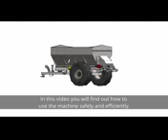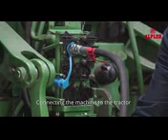Connecting the machine to the tractor. Settings with ISOBUS. Adjusting the door and more. Thank you for choosing us. So let's start.

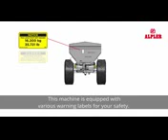This machine is equipped with various warning labels for your safety. Please pay attention to the warning labels.

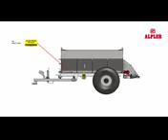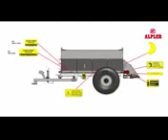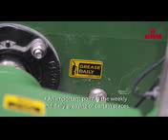Things to consider before use: keep the machine as clean as possible, check wheel nuts daily before use, and check tire pressures before use. An important point is the weekly and daily greasing of certain places. These points are indicated on the machine by yellow labels. For more information, read the user manual supplied with the machine.

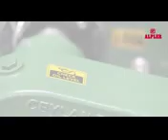Another important point is the height of the spreader discs from the ground. For effective spreading, the two spreader discs must be at the same height from the ground.

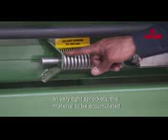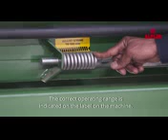During machine operation, the tension of the chain must be correct. In very tight sprockets, the material to be accumulated will cause the chain to jam while spreading, and too loose will cause the chain to jam and not return. The correct operating range is indicated on the label on the machine. Check after each load for the first day while the chain is bedding in, and adjust to the setting indicated.

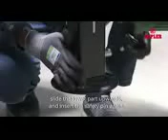First, connect the machine to the tractor. After, remove the pin at the bottom of the support leg, slide the lower part upwards, and insert the safety pin again. Connect the large diameter return hose to the return line breakaway coupling on your tractor. Connect the small diameter pressure hose to the pressure line breakaway coupling on your tractor. Make the ISOBUS connection.

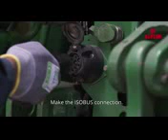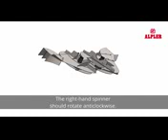With the tractor idling, engage your hydraulic spinners. The right-hand spinner should rotate anti-clockwise. The left-hand spinner should rotate clockwise.

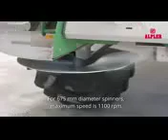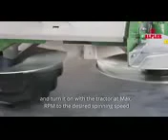Spinners can be overspeeded. Check your tachometer. For 675mm diameter spinners, the maximum speed is 1100 RPM. In any new setup, always turn off the flow control before starting and turn it on with the tractor at max RPM to the desired spinning speed. Check the flow control setting to keep the maximum spinning speed within the above parameters.

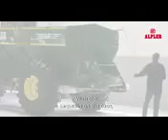With the tarpaulin on the case, you can protect the material you use from adverse weather conditions. You can manually open and close the canvas as follows.

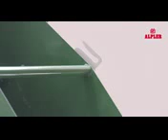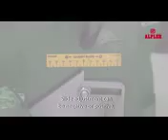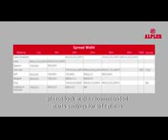Slide adjustment can be negative or positive. Please refer to the recommended start settings table. Side plates and rear side plates have to be at the same height. Please look at the recommended start settings for side plates and adjust the rear plates accordingly.

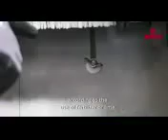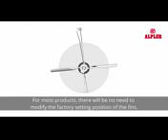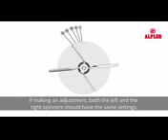You can adjust the panel on the back of the machine according to the use of fertilizer or lime. For most products, there will be no need to modify the factory setting position of the fins. However, if spreading different kinds of products, having adjustable fins can be very useful. If making an adjustment, both the left and the right spinners should have the same settings. In setting codes, L, M, S are abbreviations of long, medium, and short fins respectively.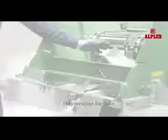This position is for lime. If you use any kind of fertilizer, you have to take that accessory off the machine. Also, you have to remove this part by moving it downward. Your spreader is ready for fertilizer now.

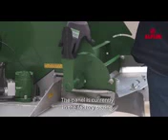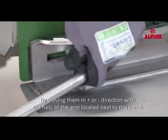The panel is currently in the factory setting. There are values for the positive and negative directions on the label. You can loosen the nuts and move them to the desired position in the positive or negative direction with the help of the arm located next to the panel.

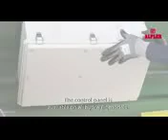The control panel is available on all hydraulic models. Thanks to the valve in the control panel, it helps you make the necessary settings with the help of the computer on the tractor. Two sections control the spreader discs in the valve, and the other two control the twin chain.

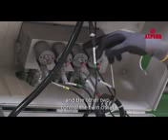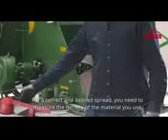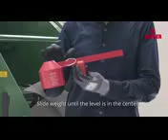You can use various materials with this machine. For a correct and desired spread, you need to measure the density of the material you use. Fill the container until full. Balance the ring, sliding the weight until the level is in the center. Read off the weight per cubic meter in tons.

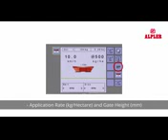Before starting to spread, you need to enter the following parameters: working width in meters, application rate in kilograms per hectare, gate height in millimeters, spinner disc RPM per minute, setting working width, and spinner disc RPM.

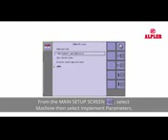From the main setup screen, select Machine, then select Implement Parameters. Enter the desired working width and disc RPM. To select disc RPM correctly, please refer to the Spread Width table.

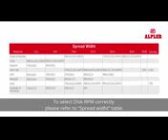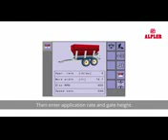Setting application rate and gate height: from the main setup screen, select Job Parameters. Also, you can use the Job Parameters shortcut on the main screen. Then enter the application rate and gate height. Refer to the rate charts at the rear of the manual to determine gate height settings.

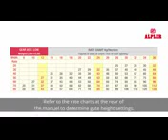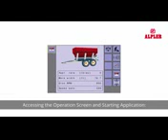Accessing the operation screen and starting application. The operation screen can be accessed from the home screen by pressing the operation screen key. Then start the spinner discs by pressing the spinner key.

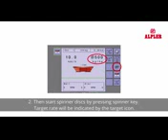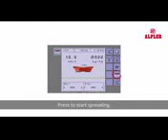Target rate will be indicated by the target icon. Starting and stopping application is controlled using the start and stop keys. Press to start spreading, press to stop spreading. Be aware that the chain will not start conveying the product until the tractor moves forward.

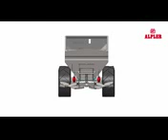As your spreader detects a necessary change of the spreading width, the speed of the spinners and the speed of the twin chain automatically change to control the spreading width on both sides, or individually on the left or right side.

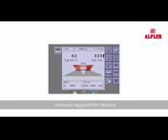Information key: the information key toggles the speed and application information section on the operation screen between display modes, showing vehicle speed, amount applied per minute, target roller RPM, and target disc RPM.